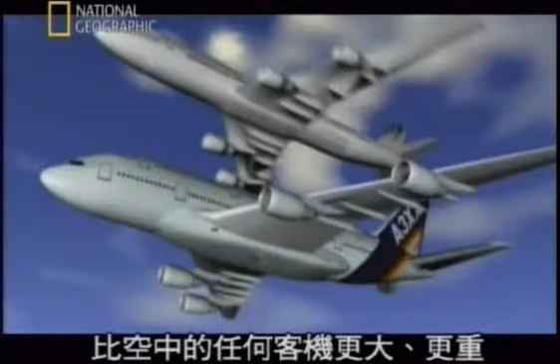It's a mega plane, bigger and heavier than any other passenger plane in the sky. It will hold more people than any commercial jet flying. Designers have spent billions. Now is the moment of truth. Will the world's biggest passenger airliner survive its maiden flight?

An early spring morning, clear skies and a light breeze over southwestern France. Crowding the fields that flank Toulouse International Airport, 40,000 spectators, backpackers, campers and journalists from around the world, all vying for the perfect spot to watch the maiden flight of the Airbus A380, the largest passenger plane ever built. It's 73 meters long, 7 stories tall at the tail, almost 80 meters from wingtip to wingtip, heavier, longer and taller than a 747, with 2 full levels of seating, enough to hold over 550 passengers.

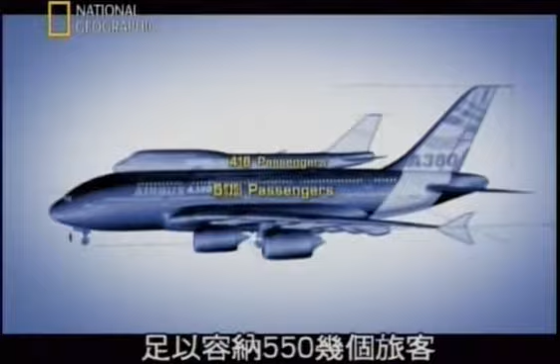Getting this monster off the drawing board required new, super lightweight materials, 4 powerful new mega-sized engines, massive new factories across Europe, and a computerized flight control system more sophisticated than any other in commercial aviation. This moment is the biggest gamble that the company has ever taken. A $12 billion investment, the company's entire future, and the lives of future passengers all ride on the success of this historic test flight.

Alongside the runway, a hush settles over the crowd as the megaplane comes into view. Gradually, it gathers speed, accelerating to reach its takeoff velocity of 269 kilometers per hour. Then, as it nears the end of the runway, the moment of truth. The massive nose tilts skyward. A sliver of daylight appears beneath the rear wheels, and the Airbus A380 takes to the sky for the very first time. The engineers and technicians in the crowd breathe a collective sigh of relief. Their baby is flying.

The question now is, does anyone want a plane this big? Will the unprecedented size prove a boon or a boondoggle? Is this super jumbo the future of commercial aviation? Or the biggest white elephant since Howard Hughes built the Spruce Goose? It all depends on whether Airbus can convince airlines that travelers will want to trust their fates to this flying cruise ship.

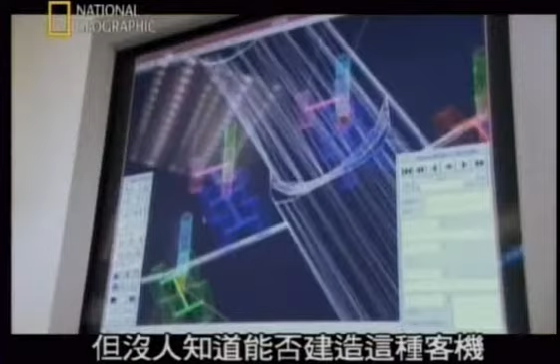It's a breathtaking dream, but no one knew if such a plane could be built. Some argued that such a craft would be far too heavy and expensive to be practical.

But a tenacious and aptly named Airbus executive, Charles Champion, wouldn't take no for an answer. He encouraged his design team to think outside the box.

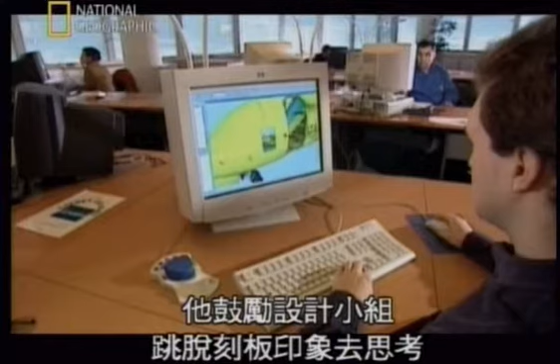There were lots of weird designs. Some looked at the double bubble, one of their first ideas - a double-wide fuselage. It looked promising, but computer analysis showed it would be far too heavy and not sufficiently aerodynamic.

So Champion sent his team back to the drawing board, and eventually they came up with this history-making concept.

A full-length, double-decker passenger cabin, with a third deck below for cargo. Space-wise, it's the equivalent of two complete wide-body cabins, one on top of the other.

The new plan called for an aircraft only 2.5 meters longer than Boeing's 747. It was 15 meters wider and 5 meters taller.

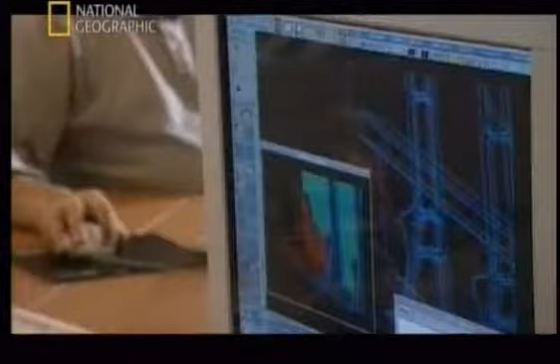But when they ran the design figures through the computer, they had a shock - the plane was far too heavy. We came up with horrid figures, saying, 'My God, this is the weight of the aircraft, it doesn't work.'

So what we did, immediately at the launch of the program, or two to three months afterwards, we launched a very strong challenge on the weight. The team set out to bring the base weight of the aircraft below 277 tons.

That's only about 50% heavier than the 747 - an ambitious goal for a plane designed to carry over 100 more passengers and their luggage halfway around the world.

Unless Champion and his engineers could find the means to beat that target, the dream would die.

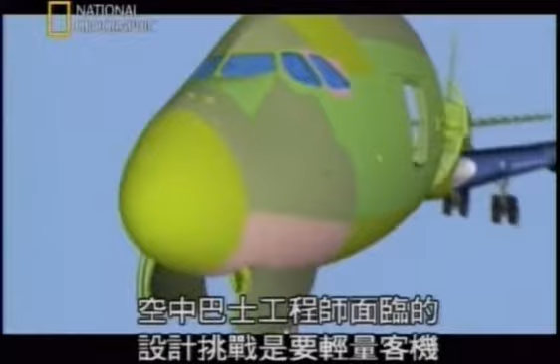Airbus engineers were faced with a design challenge that called for a lightweight plane carrying over 550 passengers at a lower cost per seat, not to mention quieter and less polluting than anything in the air. The design team knew they would have to rethink everything.

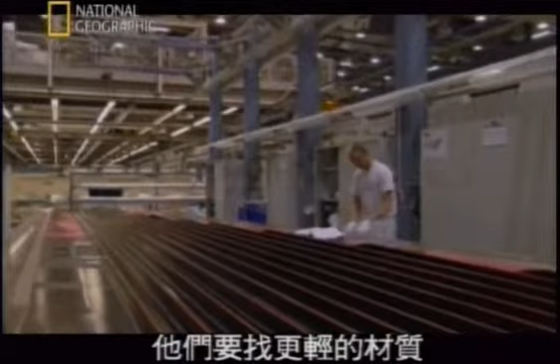They needed lighter materials, more powerful engines, larger wings, even bigger and smarter factories. Every component would have to be scaled up from supersize to mega size.

But even while the engineers were still scratching their heads over the details, the Airbus sales force was already hard at work, seducing customers with visions of the future.

They created a full-sized interior mock-up that promised passengers in coach some relief from the grind of travel, with seats an inch wider than in other planes, and overhead bins 10% larger.

Each plane can also feature a new interior illumination scheme to eliminate the upsetting effect created when flight attendants suddenly switch on overhead lights. The kinder, gentler system in the A380 mimics the gradual transition from day to night and back to daytime again.

These and other innovations make the plane distinctive, but it's the promise of opulent luxury that really turns heads. To help build excitement, computer programmers constructed a virtual showroom where airlines can bring to life their wildest design fantasies.

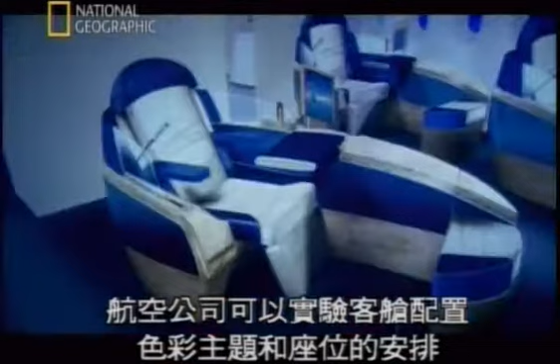Ladies and gentlemen, this is your captain speaking. I'd like to welcome you on board this 3D tutorial for the A380 main deck door. Using this 3D lab in cyberspace, airlines can experiment with cabin layouts, color schemes, and seating arrangements.

Airbus has encouraged customers to think big: bathrooms with showers, spacious lounge areas, restaurant bars, and even an in-flight salon.

But until the planes are actually put into service, most airlines have chosen to keep their final designs as closely guarded as any other trade secret.

But one early enthusiast, Richard Branson, maverick founder of Virgin Atlantic Airlines, couldn't restrain himself. He announced plans for a deluxe version of the A380, featuring a casino and double beds on the upper deck.

At a press conference, he famously quipped, 'So alongside our casinos, you'll have at least two ways to get lucky on our flights.' Of course, no dream could take flight until engineers came up with a way to lift all that weight. In late 2000, builders finally settled on a design.

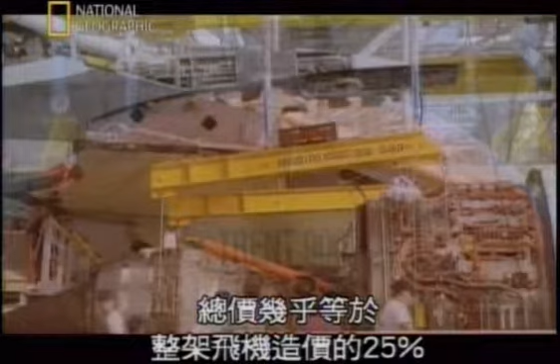For power, they would buy engines built by Rolls-Royce, capable of providing 30% more thrust than the engines used on the 747. Each massive power plant cost $15 million, as much as a ton of gold. Altogether, they account for almost 25% of the cost of the entire plane.

If there's one thing this aircraft needs, it's thrust that won't quit. Each engine provides up to 80,000 pounds of force. Running at top speed, this mega guzzler sucks down a litre of gasoline every second.

The A380 is designed for routine flights lasting 13 hours or more. That means when it's fully tanked for takeoff, the A380 carries a lot of fuel - 260,000 litres, 20% more than the load carried by the 747.

Airbus has already turned the world into a giant mega factory, with 1,500 suppliers and facilities used to build its existing planes, scattered over 30 countries, yet tightly linked by an advanced communication and transportation network.

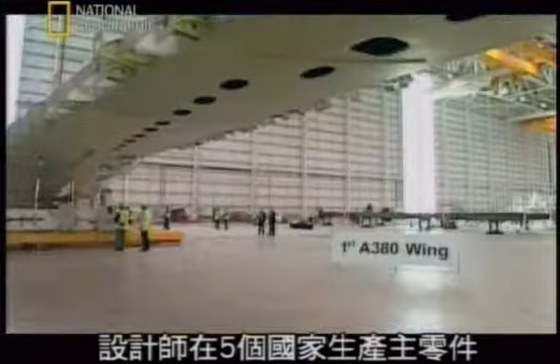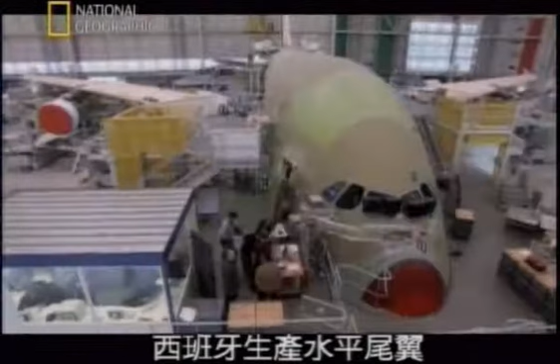To assemble the hundreds of A380s the company hopes to sell in the coming decades, planners settled on 5 countries to build the major components: wings in Wales, engines in England, the fuselage and vertical tail section in Germany, the horizontal tail section in Spain, and of course France, where all the pieces came together to assemble the finished plane.

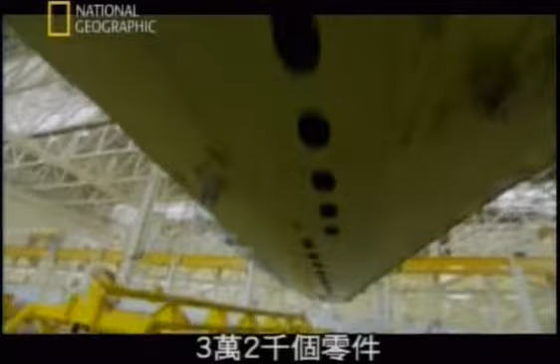The process begins in Wales, in 2 huge new wing factories, built to assemble the largest and most structurally complex commercial airplane wings ever designed. 32,000 components, shipped in from every continent except Antarctica.

The wings on the A380 are true mechanical marvels. They provide flight control and enough lift to carry the fuselage, plus the 4 supercharged engines, each weighing nearly 6.5 tons. And with 260,000 litres of fuel loaded inside 10 interior locations, the wings are also flying fuel tanks. They're one of the most critical structural components in the entire aircraft.

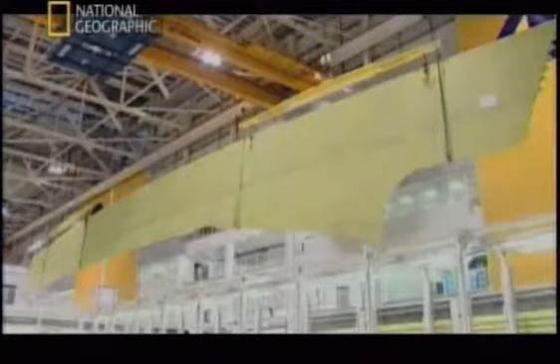The precision construction process begins with sheets of aluminium, destined to be shaped into the 10 panels that cover each wing. Each piece has its own shape and weight requirements. To whip one up, just follow 3 not-so-easy steps: shape it, wrap it, then bake it.

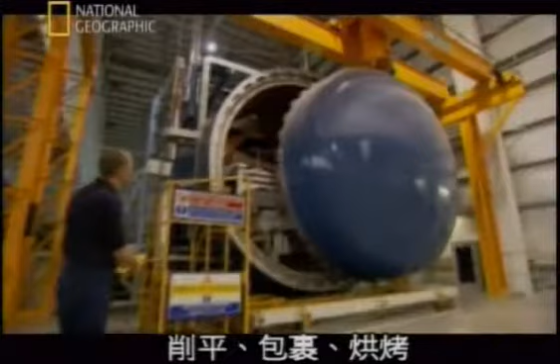This 34-metre-long slab of aluminium weighs in at 5 tons, way too heavy for the wing panel it's destined to become. In its final form, it will weigh close to 1 ton. So off it goes, to get the aerospace version of a tummy tuck.

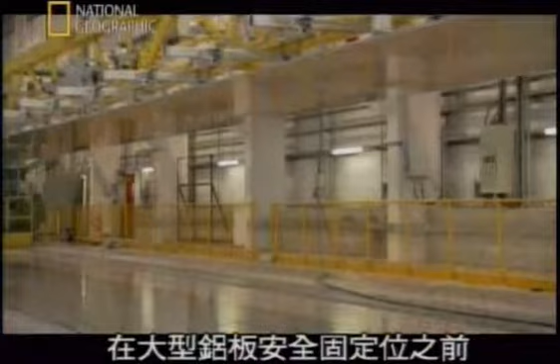Overhead cranes use 32 powerful suction nozzles to lift and transport each aluminium slab. It's a dicey ride across the factory floor before the huge sheet can settle safely into position.

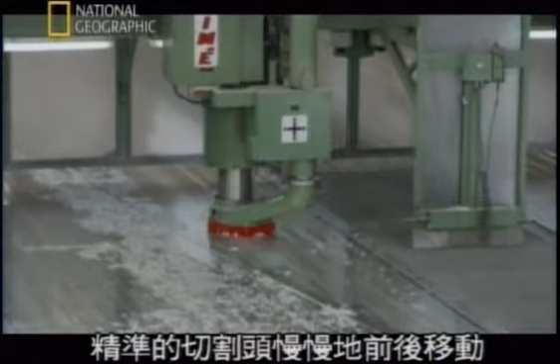Now under the control of a massive horizontal metal shaping device, a milling machine 40 meters long. Like an oversized cheese grater, the precision cutting head slowly cuts back and forth across the surface of the wing, painstakingly shaving the aluminium until the panel shape matches the 3D contour map stored in the machine's computer. The process takes up to 3 days. It eliminates 75% of the panel's weight while maintaining its strength.

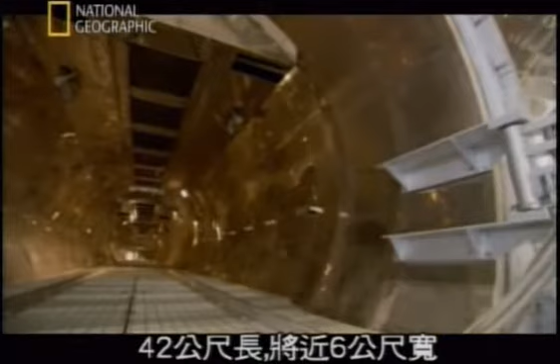Then it's ready for the oven, one of the world's largest pressurized heat chambers, 42 meters long, almost 6 meters wide. Technician John Massey has cooked plenty of wings for smaller Airbus planes, like the A320. It's a challenge to see it go from the size of the 320 to the size of the 380. It's a huge, huge jump.

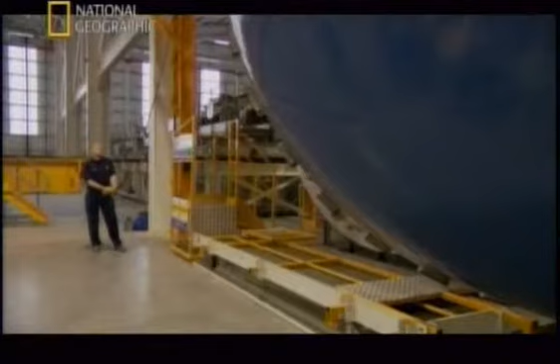The A380 wings are 50% larger than A320 wings. That means a 50% greater chance of error in this critical process. Baking requires careful setup.

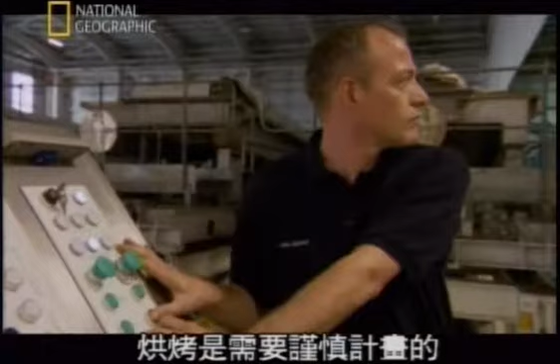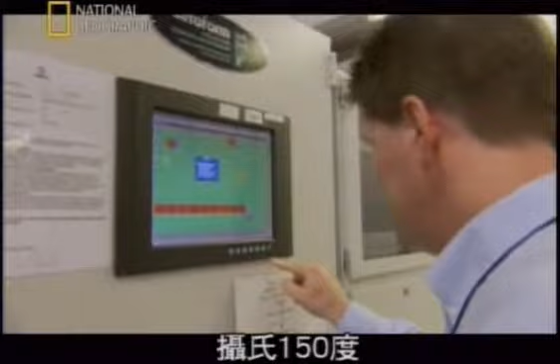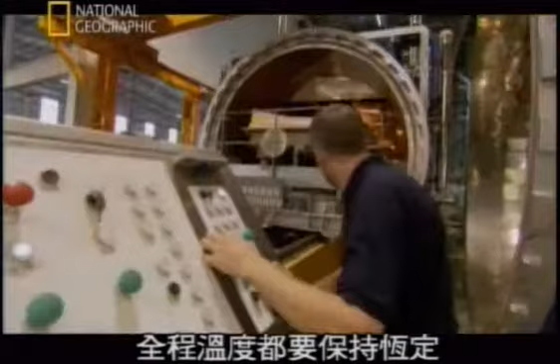First, Massey and others place the segment in a special metallic form. Then they vacuum seal the entire assembly with a massive piece of plastic shrink wrap to protect the metal from contamination. Inside, the heat must be uniform across the entire panel, 150 degrees centigrade, with no room for error. We try to avoid any changes in the vacuum or the temperature, so the temperature must remain constant right throughout the process. It must maintain within 3 degrees, otherwise the run is invalidated.

After 24 hours, the panel is ready. Specially equipped vehicles rise up and move into place in front of the oven. All eyes are on the plastic protecting the wing panel.

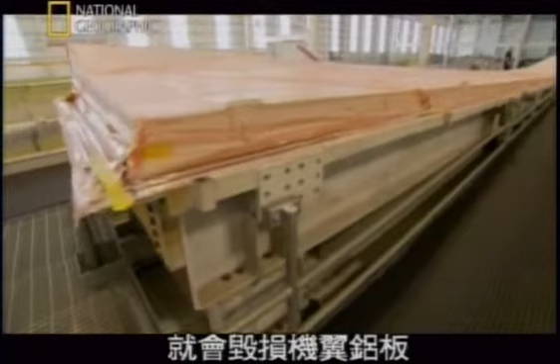If it breaks, the aluminium wing piece is compromised. A disaster. The entire wing panel would be worthless. If the bag bursts, it means starting the job again from scratch. Anxiously, they scan the surface for any breach.

At last, the wing is cool enough to touch. And good news, the bag appears to be intact.

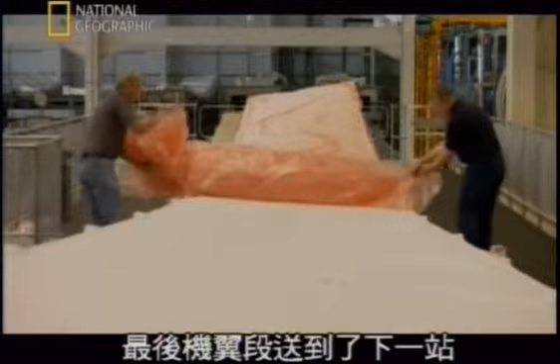Finally, the wing segment arrives in its docking bay. Here, the technicians first remove the plastic and cloth wrap. Now begins the tedious search for flaws.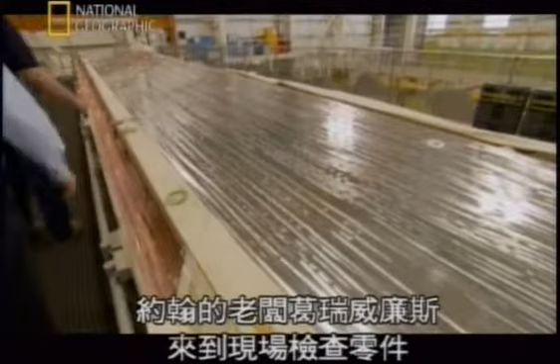John's boss, Gareth Williams, arrives to inspect the piece. He retrieves small metal rods that were baked onto the top of the wing panel. Each of these cylinders tells an important story about future safety. These are test pieces which are made of the same material as the wing panel, and we use them to confirm that the heat process this part's just gone through is correct and to the right specification.

When this testing phase is complete, Gareth and John get the OK to move the wing to its next destination.

The nearby wing assembly plant is an enormous brand new factory located just up the road. It's one of Britain's largest industrial buildings built in this century, nearly 85,000 square meters in area, equal to 12 full-size football pitches.

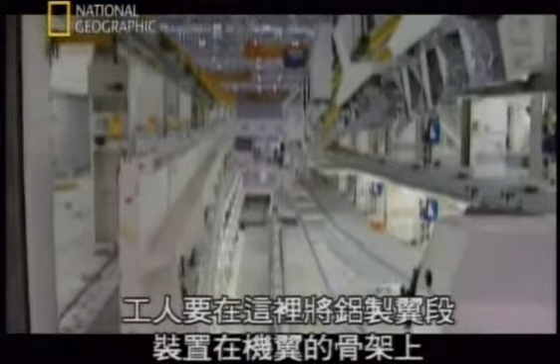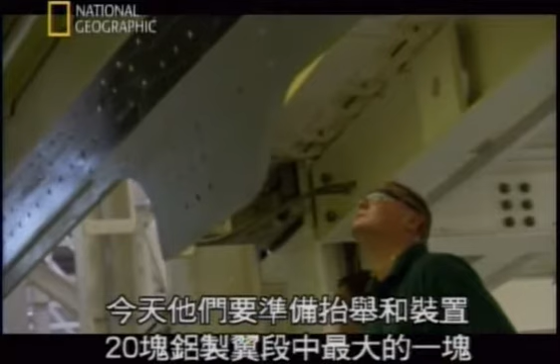This is where the builders attach the aluminium skin panels to the wing skeleton. George Lea guides his team through the tricky assembly process. Today they're preparing to lift and place one of the largest of the 20 aluminium panels, 34 meters long and weighing in at more than 1 ton.

Size is a great challenge because everything requires some form of overhead lifting. Nothing can be lifted manually, so virtually everything requires overhead craneage movement, and therefore the management of the craneage system is very, very important. The panel hangs like a huge guillotine, suspended over the factory floor.

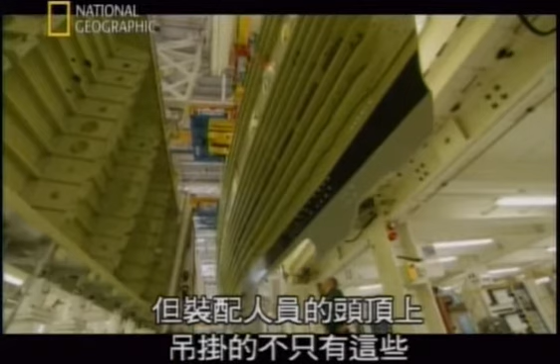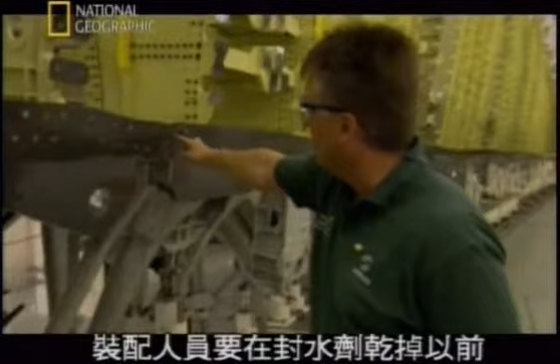But that's not all that's hanging over the assembly team's head. Time is running out. Along the edges of the partially constructed wing, builders have applied a sealant that'll help ensure the integrity of the fuel tanks. The sealant dries quickly, within hours. The team must fit the wing panel into place before the sealant dries, or the wing could be defective.

This time they're cutting it close. The only concern I've got is the time factor. If they don't succeed, the team will have to scour the sealant off the aluminium surface and start the whole process again.

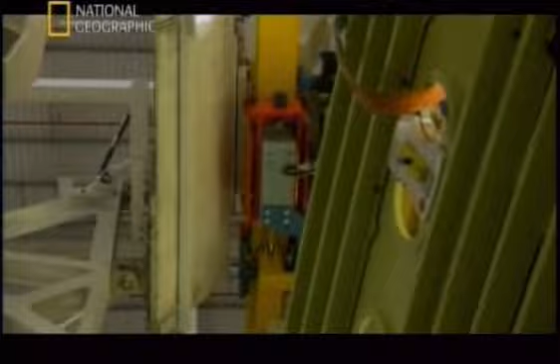Finally, the panel settles into place. 1 down, 9 to go.

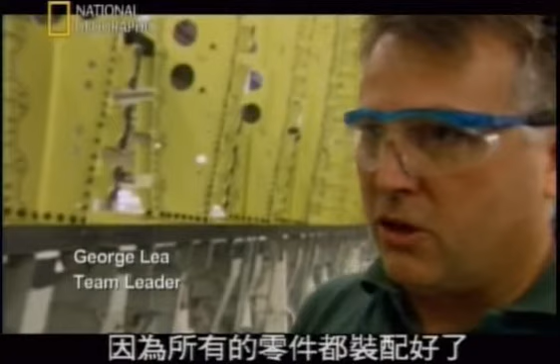It can be stressful, yeah, it can be stressful. At certain times, it's an enjoyable job, because when it actually all works and goes together, it's quite enjoyable. You've made it an achievement.

Now it's time to glue and bolt together the pieces, like building the world's biggest model airplane wing.

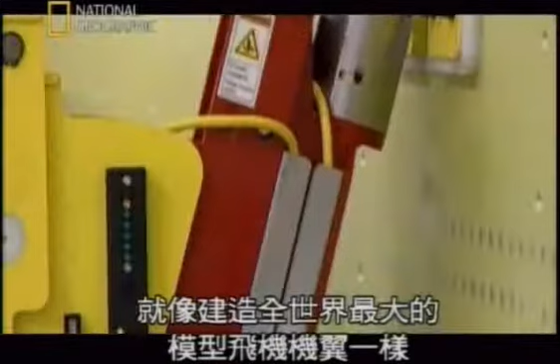This part of the process remains a carefully guarded trade secret. The company wants our cameras off. No cameras.

The secret assembly process inside the jig will take nearly 4 weeks to complete, but it takes more than a wing to make a plane. All across Europe, more factories are coming online, pumping out body parts of this giant Franken plane.

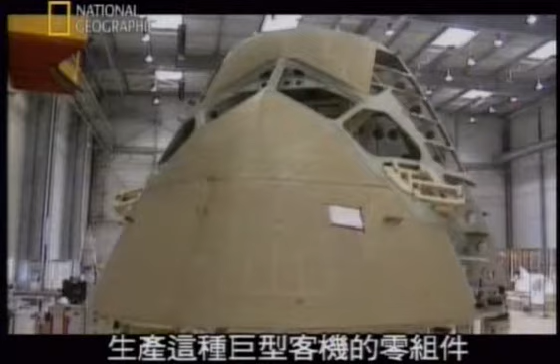But not everyone is happy to see this kind of progress. Some locals in Germany are up in arms over Airbus's ambitious plans.

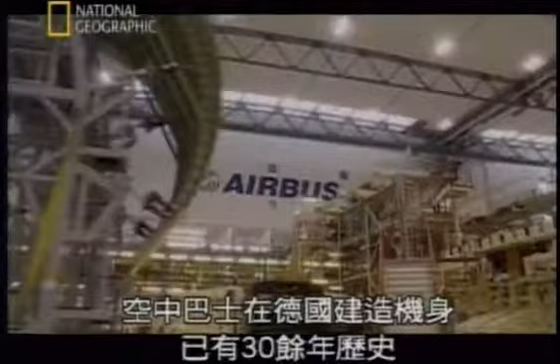This is the newest Airbus factory in Hamburg, a megastructure big enough to house 4 A380s side by side. Airbus has been building airplane fuselages in Germany for more than 30 years. But with the announcement of the A380, the company needed to massively expand the site and send finished planes here to get tricked out on the inside

and painted on the outside. No matter what the customer wants their plane to be, a 550-seat cattle car, a high-class hotel in the sky, or even a heavy-duty freighter, this is where the seats, the carpets, the stairs, and yes, even the bar and the waterfall will all be installed.

The expansion plan called for 3 new buildings and a longer runway to accommodate the massive plane, but there was a problem.

Airbus's main factory here sits alongside Germany's Elbe River, smack in the middle of Europe's largest tidal wetlands. It's a very special area because we have there the influence of water from the country and tidal water from the sea. So we have a mixture of sweet water and salt water.

This fragile ecosystem is home to 70 species of migratory birds. Now 71 if you count the Airbus A380. Airbus wanted to fill in 140 hectares of pristine wetland, and local activists cried foul.

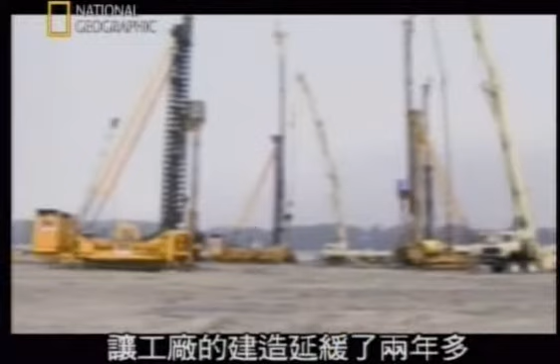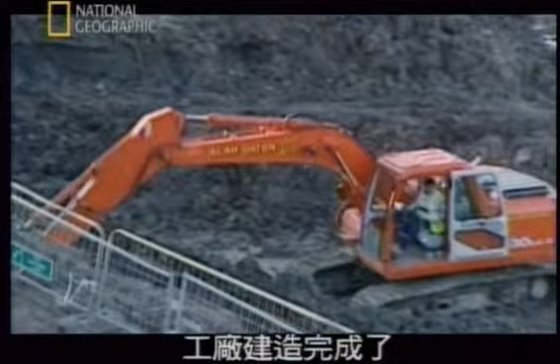A pitched battle in the courts and demonstrations in the streets delayed construction of the factories for over 2 years. But eventually, local and national politicians who wanted to bring business to the community intervened. The factories went up. One got busy building fuselage segments, but the other two stand nearly empty.

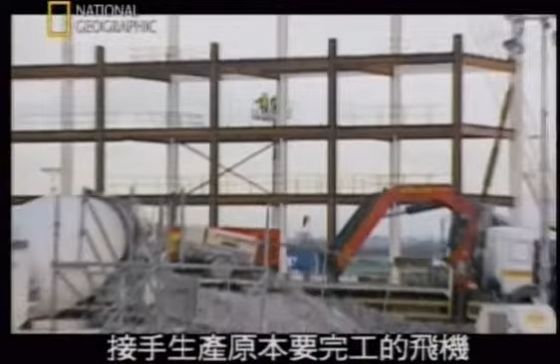More lawsuits still block the Hamburg facility from taking delivery of all of the planes it's meant to finish. Unless the company wins in court, it may have spent a few $100 million building a factory of little use.

The problem lies with the runway. Airbus needs a longer runway to accommodate a heavy-duty cargo version of the A380.

We need the runway extension in Hamburg for the pilot to test the performance of the aircraft. And he only can test this when he has an aircraft with a weight which is approximately the weight you normally have in cruise altitude and a normal scheduled flight.

That plan to lengthen Hamburg's existing runway has met with considerable resistance from locals. Their concern: extending the runway will bring the tarmac to within just 450 meters of village orchards, and uncomfortably close to a Lutheran church that houses a priceless organ built in 1688.

A delicate instrument that could be damaged by ground vibrations and wake vortices, turbulent bands of air similar to miniature tornadoes. We have very precise information on the generation of these wake vortices, so small, let's say, tornadoes, wind generated by every aircraft, more or less, which can affect buildings and also persons close to the runway or close to the flight path.

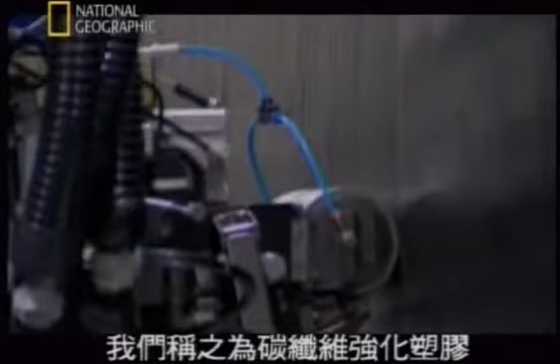But just 57 kilometers away in the town of Stade, another big gamble is underway. The company is using a futuristic material to build the largest commercial aviation tail fin in the world. It's called carbon fiber reinforced plastic, and it's made out of the same stuff that gives diamonds their incredible strength.

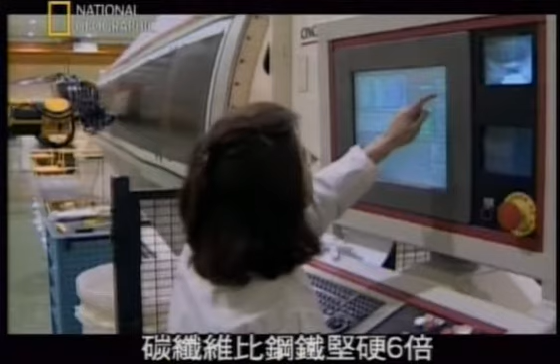Carbon fiber is 6 times stiffer than steel and much lighter. It's the only option if builders are going to keep the weight of the plane below the target of 277 tons.

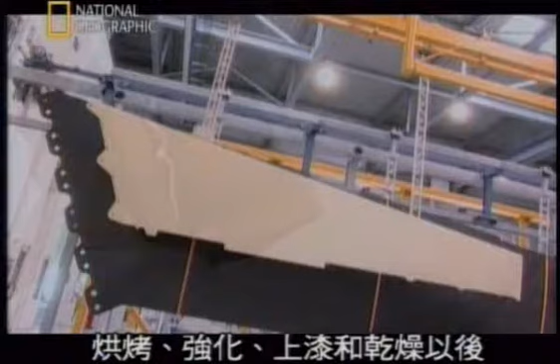Unlike forged metal, carbon-reinforced plastic parts are actually woven, like cloth. Fabricating machines spin out tail panels by combining super-strong carbon fibers with plastic resin to create almost any shape the designers can imagine. After baking, strengthening, painting and drying, technicians join the lightweight panels to the tail skeleton with the help of this computer-controlled riveting robot.

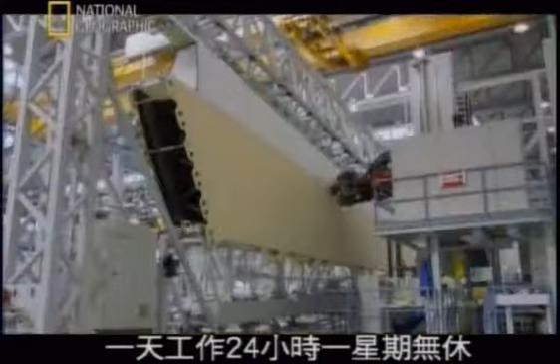Working around the clock for a week, the robot makes 10,000 critical connections with tolerances no human can match. The integrity of the tail fin is crucial to the safety of passengers. Airbus engineers know only too well what can happen if a tail structure fails.

It was the second deadliest crash in US history, and investigators made a disturbing discovery. It had been caused when the tail fin and rudder, made partly out of composite materials, sheared off as the plane accelerated. Investigators concluded that cockpit errors, not a failure of the carbon composite material, most likely caused the crash.

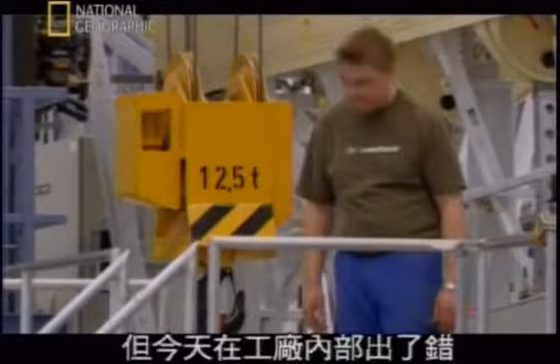Builders have applied the lessons of that catastrophe to the tail fin of the A380. But today, something's gone wrong on the factory floor. A lightning strike zapped the power supply, and now the precision riveting robot is dead in the water.

We had a storm, a lightning strike. The PC failed and the hard disk was completely gone.

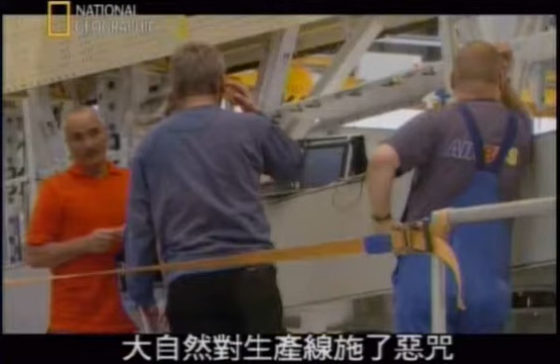Mother Nature has thrown a wrench into the works, causing a total crash of the system.

It is electricity. Sometimes it happens. Normally we are protected, but it can just happen.

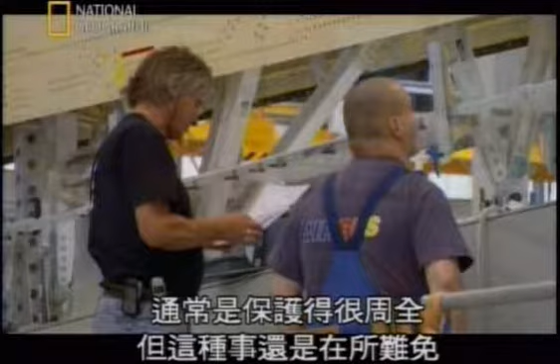Critical hours pass as Kai Baumgartner and his colleagues struggle to get the robot back online. If they can't fix the computer, they can't make the deadline set for finishing this tail fin. Kai and his team must find the problem, and quickly. By the end of the shift, the sound of riveting echoes through the factory once again.

Kai is finally back at work, personally verifying that every one of the 10,000 connections is perfect. A tiny camera positioned on the end of the riveting machine allows Kai to carefully examine each rivet, making sure to catch any abnormalities in the process.

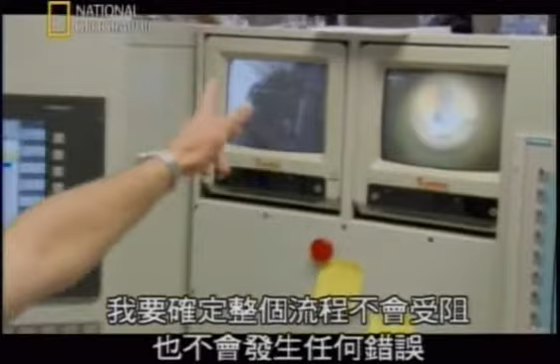I make sure that the drill doesn't get stuck or any mistakes happen. I have my different systems here. It can happen that something is stuck or that an error occurs.

It's a repetitive process, but Kai must remain vigilant to safeguard the lives of future passengers.

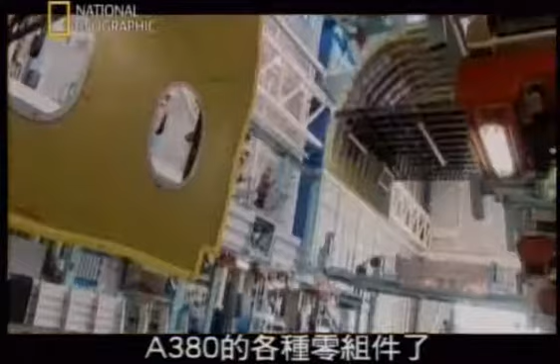Around the world, manufacturers and suppliers are putting the finishing touches on the components of the A380. But putting all the pieces together will be a logistical nightmare. Airbus's existing transport system, the custom-built mega freighter called the Beluga, is too small to haul the A380 components to the assembly factory in Toulouse, France. So builders came up with a risky plan to haul millions of dollars of critical components by water and land.

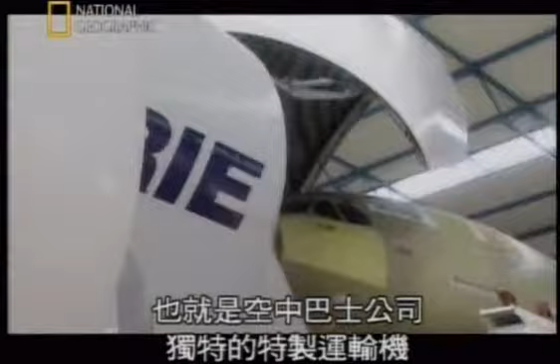Airbus had a problem. They needed to move pieces for the largest passenger plane in the world from factories all over Europe to their final assembly plant in Toulouse, France. For smaller planes, they could use the Beluga, Airbus's distinctive custom-built transport plane. The Beluga's cargo hold measures 7 meters high, 7 meters wide, and 38 meters long, big enough to swallow the fuselage, wings, and tail sections of Airbus passenger planes like the 150-seat A320.

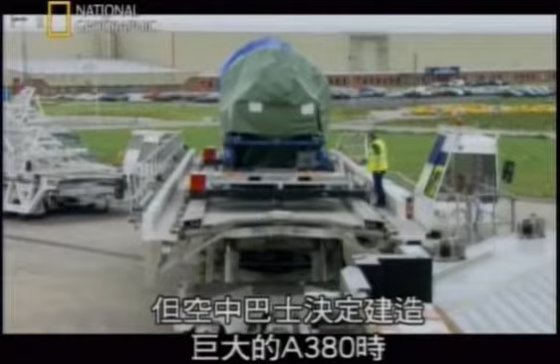But when Airbus decided to build the massive A380, the sheer size of the parts overwhelmed even the Beluga, which is far too small to carry the A380's enormous double-decker fuselage or its record-breaking wings. So to get their parts to the assembly plants, the company now had to move them by sea and over land, instead of a 2-hour ride in the belly of the Beluga. Parts for the A380 joined a days-long parade of specially outfitted ocean ships, river barges, and trucks.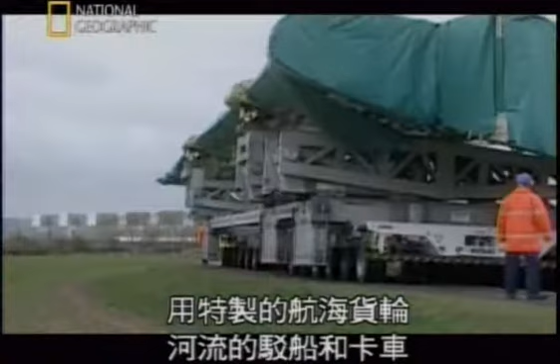Keeping this massive system on schedule is the job of Surface Transport Coordinator Philippe Nedelec, who has to keep it all moving fast. I like to say that I am a kind of conductor. I have to impose the tempo to everybody.

Wings and fuselage arrive by sea in the port city of Pauillac in Bordeaux. From there, it's 96 kilometers by barge down the Garonne River. It's a tricky bit of navigation to clear the historic Pont de Pierre Bridge, a prized landmark built by Napoleon almost 200 years ago. We have to cross a very old bridge. And at the beginning, the Bordeaux people were very afraid of what these Airbus people were going to do with our nice bridge.

To maneuver beneath the Pont de Pierre, Philippe and his team keep careful track of the tides and the weather. If they don't time their trip just right, if the water is too high or the currents too strong, they could collide with the bridge.

They could destroy precious cargo and damage a priceless piece of history as well. But waiting for the perfect moment isn't always an option. Suppose we miss a call for weather conditions or some other things, then the boat can miss a tide, and we can miss 6 hours, and this 6 hours you can miss a week because we cannot start the road convoy every day. It's not so easy. We cannot start when you want.

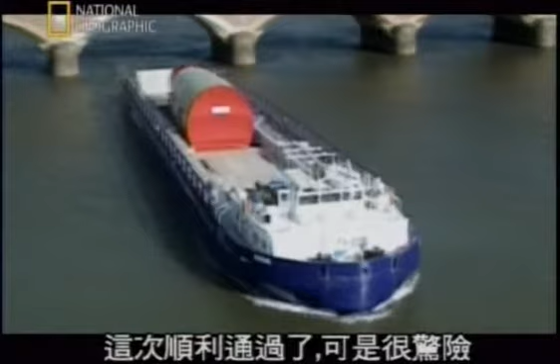Next, it's a handoff to a fleet of trucks and their escorts. Now it's a slow crawl, 16 kilometers per hour for the last 250 kilometers of the journey. You cannot leave these trucks alone, so you have some trucks for assistance. One convoy is 6 trucks, plus, I would say, 15 vans, plus some cars, plus motorbikes. Almost 60 people moving from 10 at night to 5 to 6 in the morning after.

It's a bizarre display. Giant airplane parts inching along narrow French village roads, sometimes coming within just 50 centimeters of buildings. No matter what time of night, crowds gather to watch this late-night parade of parts. You see these people at 2 o'clock in the morning and you don't know which attitude you must have. Sometimes you say hello, hello. It's very, very strange.

People are very, very interested with that and very pleased. It's like a show, a permanent show, paid by Airbus. So far, this roadshow has had an exotic appeal. But will they still be clapping when convoys like this grind through town once a week? Ultimately, that's the pace Airbus will have to keep if they're to meet their manufacturing targets.

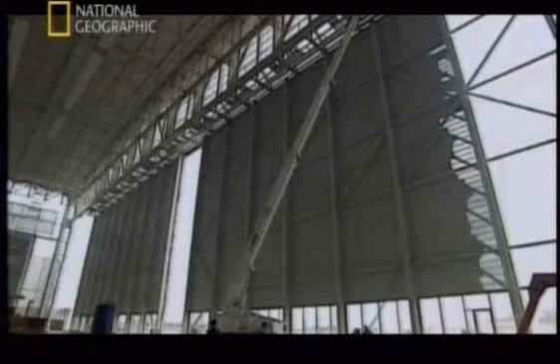At last, the convoy arrives at its destination, the final assembly line, the nerve center of the entire operation. The final assembly line sits on the edge of Toulouse's Blagnac Airport. As with all A380 factories, this one is huge: 500 meters long by 250 meters wide and 15 stories tall, with 32,000 tons of steel, enough to build 3 Eiffel Towers.

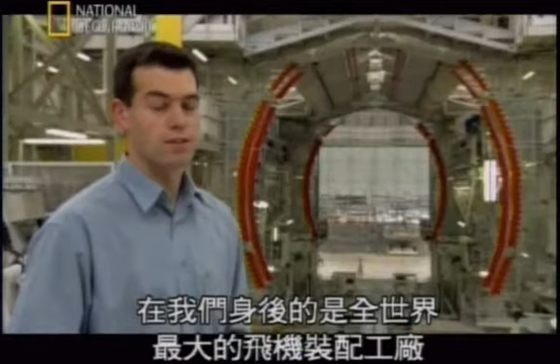It's in here that the massive plane finally begins to take shape with the help of a gargantuan assembly structure known as a jig. According to Julien Pouillou, there's nothing else like it in the world. We're standing in front of the biggest jig that is used in the world to assemble an aircraft. This is the Station 40.

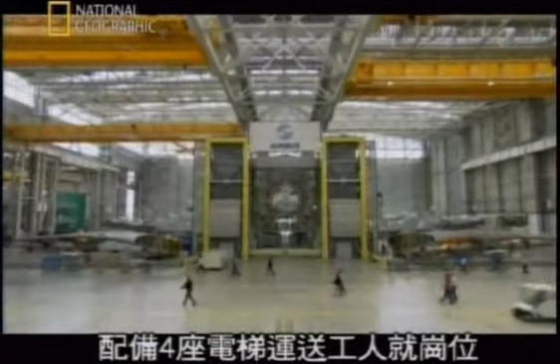Station 40 is where the fuselage, wings and tail all come together. The one-of-a-kind jig stands 5 stories tall, weighs 1,200 tons, and comes equipped with 4 elevators to carry workers to their stations. This is where theory becomes reality, as pieces made all over the world finally come together.

If there's been any error, if the pieces don't measure up to spec, or if the joints don't come together just right, within millimeters, the huge passenger craft won't be fit for flying.

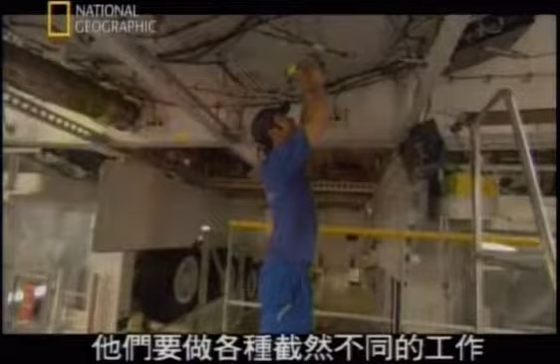The lives of future passengers depend on the steady hands of these craftspeople and engineers, working inside the mighty Station 40. The challenge is for us to assemble those pieces together at the same time because we have a lot of workers working in the same area at the same time, and they have to do all sorts of completely different tasks. One has to take care of the wings and one has to take care of the fuselage, and so they are not doing the same job, but they have to do it together.

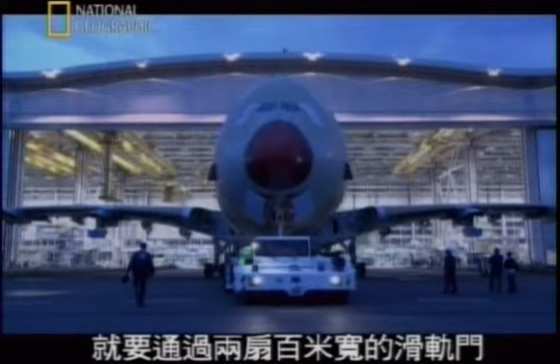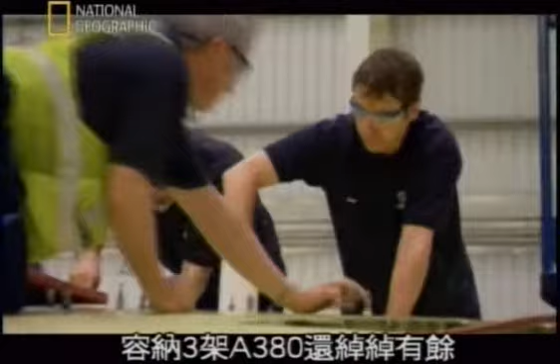Work on this plane now proceeds at an intense pace. It'll take 4 weeks to complete the assembly. Once the plane has been released from Station 40, it moves through a pair of 100-meter wide sliding doors and makes its way to the systems hall. Inside this gigantic space, 3 A380s can sit side by side comfortably, while technicians swarm over the superstructure, testing the electrical, hydraulic and plumbing systems that'll bring the dormant aircraft to life.

Building just one A380 is a massive job, but for Airbus to survive, they're going to have to speed up production to a breakneck pace. Eventually, the Station 40 team will have to crank out a defect-free plane every week.

But before that can happen, the plane must be proven airworthy. Now all eyes are on the skies over southern France as the gathered crowd wonders, will the A380 survive its maiden flight?

At Blagnac Airport in Toulouse, 40,000 people anxiously scan the skies, searching for some sign of the A380. All flights in and out of the airport are put on hold. The skies over Toulouse are eerily quiet.

Nearly 4 hours have passed since takeoff. If all goes as planned, the huge airliner should swing into view at any moment. But if there's a problem, the flight crew will quickly discover how well their training has prepared them for disaster.

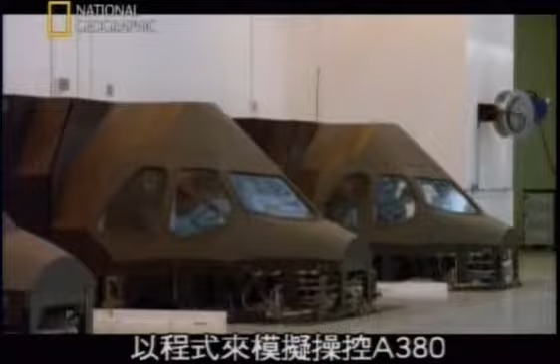Much of that training took place using powerful computers, programmed to mimic the behavior of the A380. That's the theory anyway. In a simulator like this one, with a computational engine 500 times more powerful than a home video game console, photorealistic visuals help pilots to get a feel for the plane.

Despite the A380's unprecedented size, Airbus engineers have tried to make it fly like any other airliner. 100 knots. The task of testing the verisimilitude of the simulator experience rests on the shoulders of pilot Claude Holvec.

I would say that it's exactly as a conventional aircraft. And it's quite amazing because this aircraft is so big and so heavy. This surprised most of people, and especially pilots.

One of the most important functions of simulators is to give pilots the chance to flirt with disaster. Very simple, and one engine is shut off. This is the engine number 4, and look what is happening. The aircraft is just moving slowly on the right side.

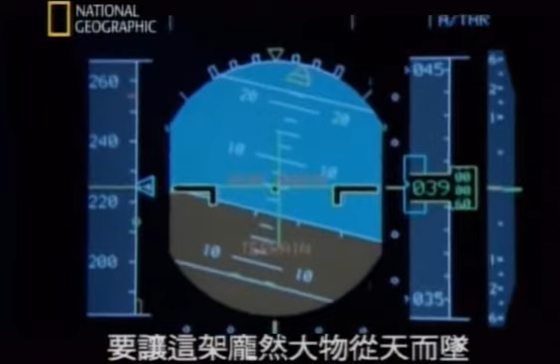It would take a lot more than an engine failure to knock this monster out of the sky. But test engineers are nothing if not imaginative, and they've loaded their simulators with more than 400 different catastrophe scenarios. Everything from a fire in the cargo hold to a devastating lightning strike.

The exercises are useful, but no computer can simulate the awesome responsibility of shepherding 555 passengers through the stratosphere. The challenge is to fly with many passengers. I think this is the greatest challenge, yes.

Outside, all eyes are on the sky. The wait is excruciating. Then, a glint of reflected light. At last, the mega plane sails into view.

Eager reporters and photographers race to the edge of the tarmac to record this historic moment. A showy flyby excites the crowd. The plane makes a steep turn, lines up with the runway, begins its final descent.

Then, at long last, touchdown.

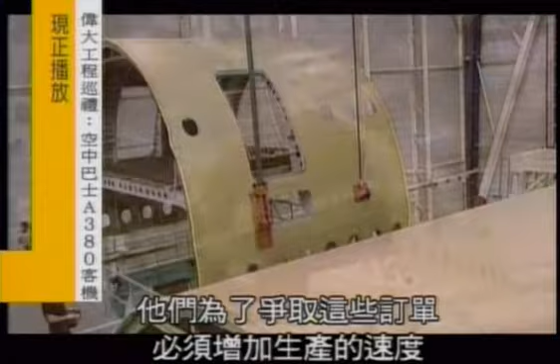At the time of the test flight, Airbus had 154 orders and still needed 96 more just to break even. To fill those orders, they must dramatically increase the speed of production and convince the world's airlines to pay nearly $300 million for each plane.

But even while potential customers were lining up to drool over decor, and the engineering team was still basking in the afterglow of the successful first flight, Airbus surprised the industry when it unexpectedly announced a 6-month delay in the delivery of the first aircraft.

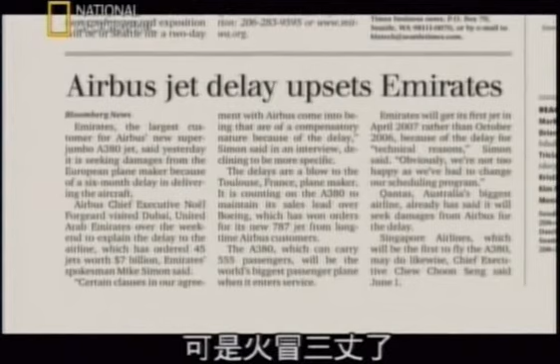Early customers who took the risk and put down deposits before the first plane had ever been built are not happy. Some analysts believe the plane is still heavier than Airbus promised. But Airbus insists that the delay is merely routine.

The real achievement will be when the customer says, great, this is what I expected, I love it, give me more. If the last 40 years in the history of aviation is any guide, and more people fly further and more often, year after year, then Charles Champion's daring bet may well pay off, and the A380 just might become the flagship of commercial aviation well into the 21st century.